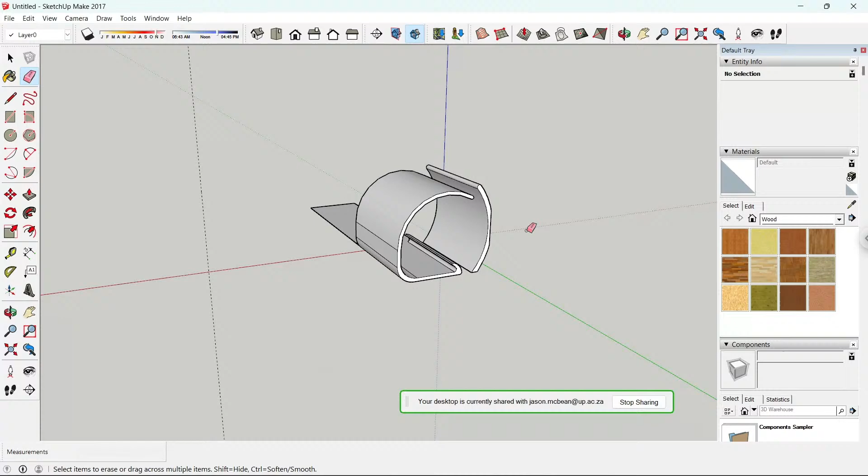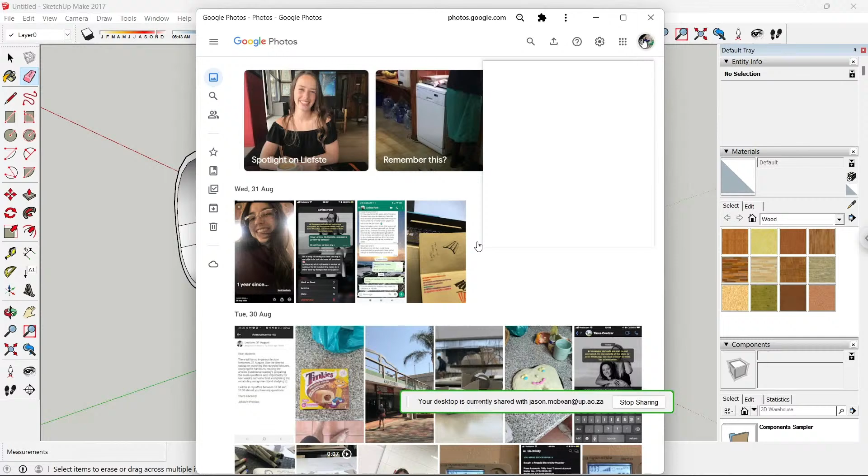So I have like 5 different accounts and it's grabbing photos. No worries. I'd use your university one because at least you get unlimited space. My personal one is full now. Awesome. Yeah, it's screaming at me at every moment on my laptop. You're at 101%, okay.

How's it going? Go to Google Photos.

It's taking me the wrong way around. No. My brain's not working, no worries. Is it this photo over here, maybe? Where, was it this photo here?

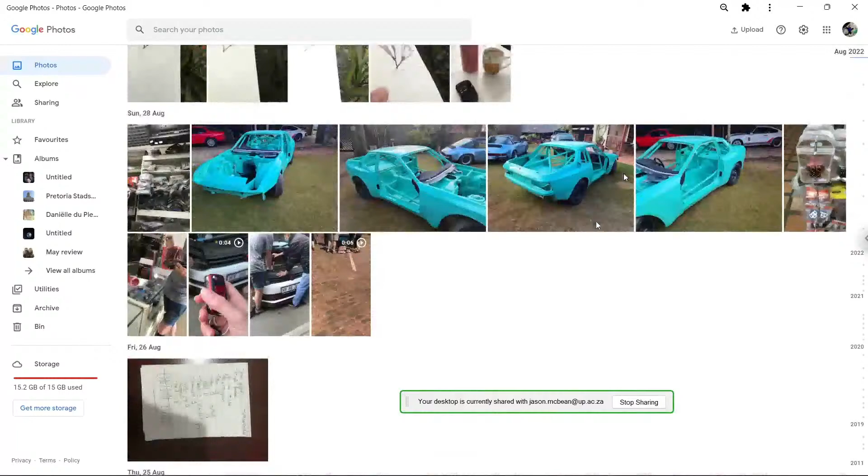Do you have any sketches here we can look at? This one or the other one. I don't know that, okay. Sure, go.

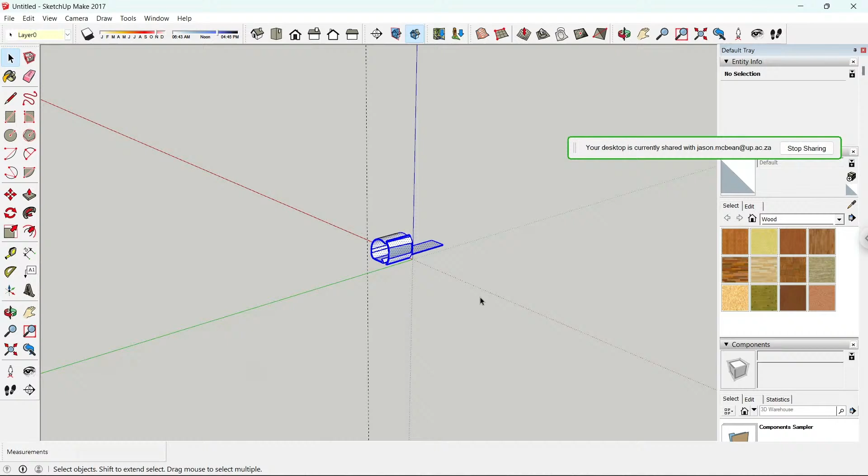Yeah. Okay now, can we make a copy? We'll do that in a minute. Okay, yeah, so what I'm going to do is I'm going to delete this guy. This is going to be, so let's just create a face. And I'm going to use this face. You'll see now, this is going to be like, it's going to be quite organic what we're going to do. So let's just create quite a long one.

And I'm going to extrude this up. Spacebar. Push pull.

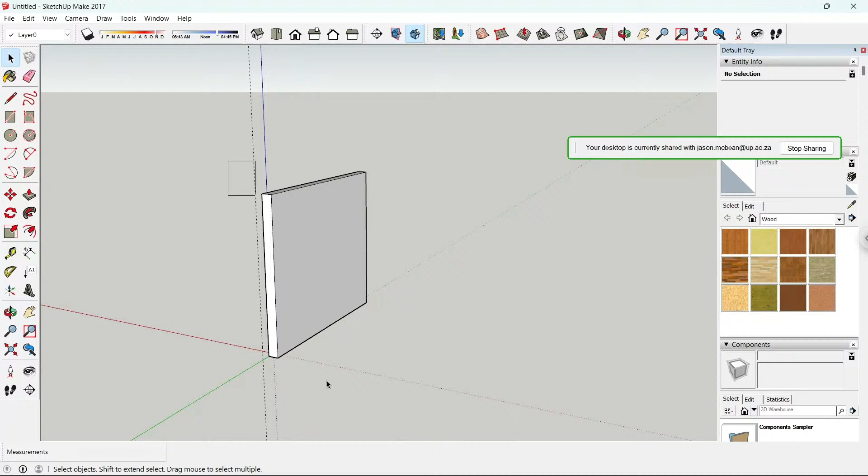So what we're going to do is we're going to create a shape. All you've got to do is break this thing up into pieces. SketchUp can use plugins to help do more organic stuff, but this is just creating a series of shapes that you then cut away what you don't need. So you're going to grab this edge and use the copy tool. So C, M for move, and control.

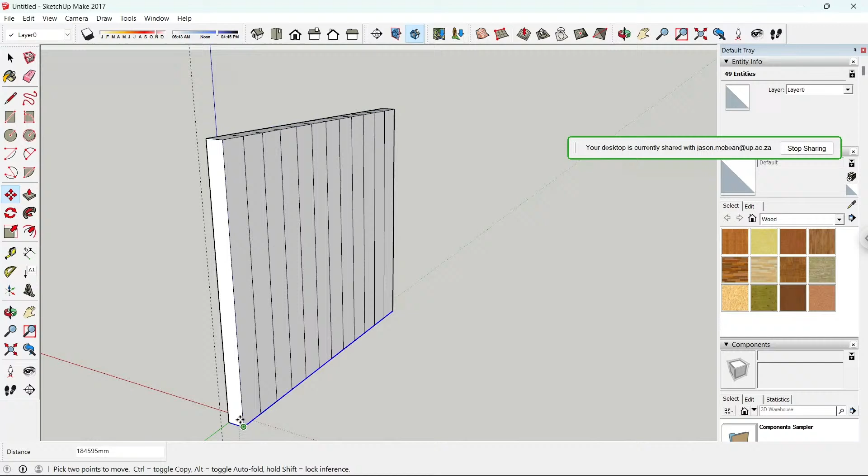If I drag it to the end and divide by 12, you see what it does? It breaks this face up. I'm going to do the same in this direction. Move, control, and divide by 12. This is never going to be 100% perfect, but you're going to make a long part of it.

Then what you do is you start the line tool and create the shape that you're looking to create. All 3D software is doing this to a degree.

And let's go to there. I'm just doing this very quickly. Go back to there, go back to there. You'll see that it'll cut this into different pieces. Now, exactly that - you can use the erase tool and get rid of the faces that you don't need anymore.

You can get rid of - oops, don't do that, don't do that. I'm going to get rid of all this stuff here because technically I don't need this anymore.

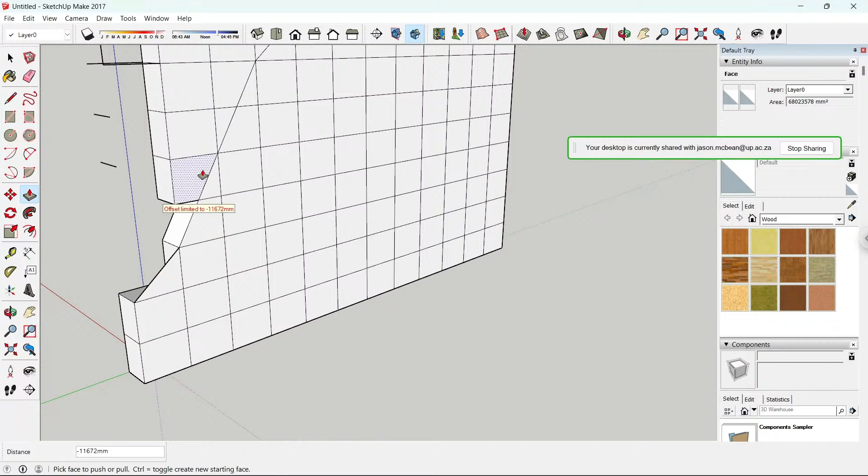You can also use the push-pull tool when you get closer to these edges - you can push-pull these out. So maybe that's a better option for now, because then you can just get rid of... yeah, it gets the width, memorizes the width. You can double click on it.

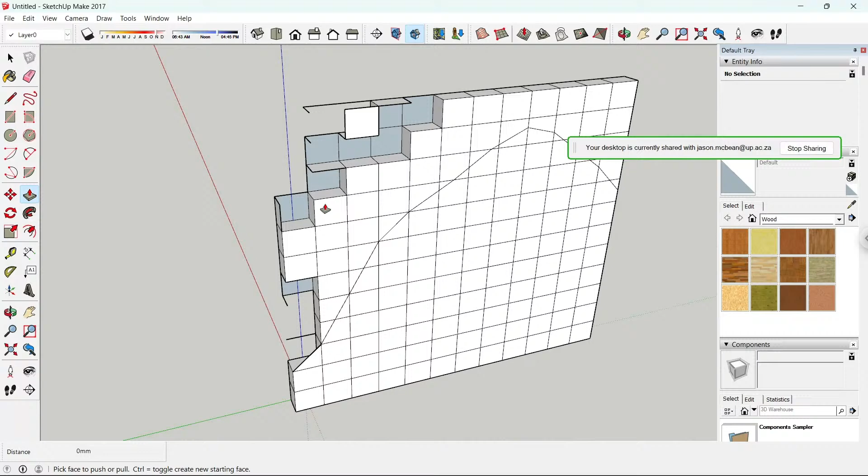So I'm going to get rid of this one. Yeah, there we go. There was just a back face here which I should have maybe handled differently - I see it hasn't quite worked there. So let me just quickly go back and use the push-pull tool for most of them. That's going to help.

So grab that guy, push-pull. You're going to use the push-pull tool, shortcut P. Double-click, double-click, double-click, double-click, double-click, double-click. These ones you can also just select around here, then delete them. Yeah, exactly - you just want to punch out the shape.

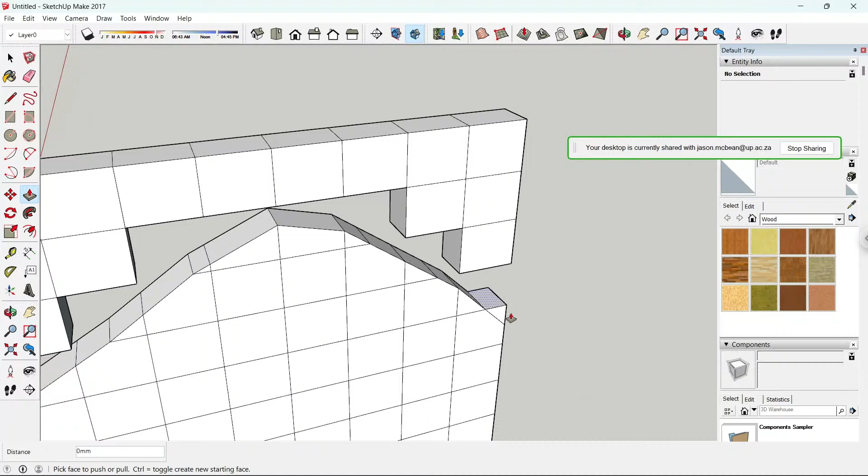Oh, see now I've broken the chain of command. Now you literally go and cut out what you're looking for very quickly. And I mean, this is fine. You come on. Yeah, so now come on. Good, there's a lag with this.

Okay, now we can get rid of the ones that we don't need. There's a bit of a lag with the internet, so that's why it's giving me a bit of an issue here sometimes. Okay, now you create the shape that you're looking for.

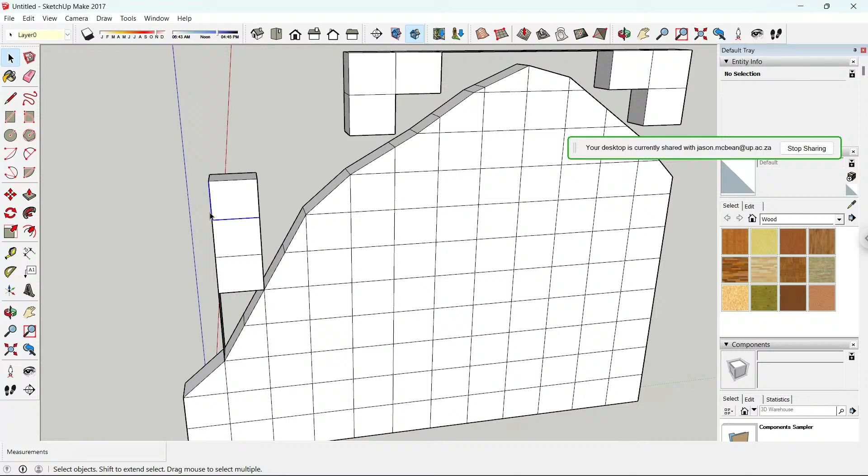Now what you can do is actually use - I'll make this a group. I'm going to put this in a group so it's easier to control when you need to shape this around. So you're going to use this like clay, and shape it around a bit of line work.

Let's go to front view. Let's go to your cameras - camera parallel.

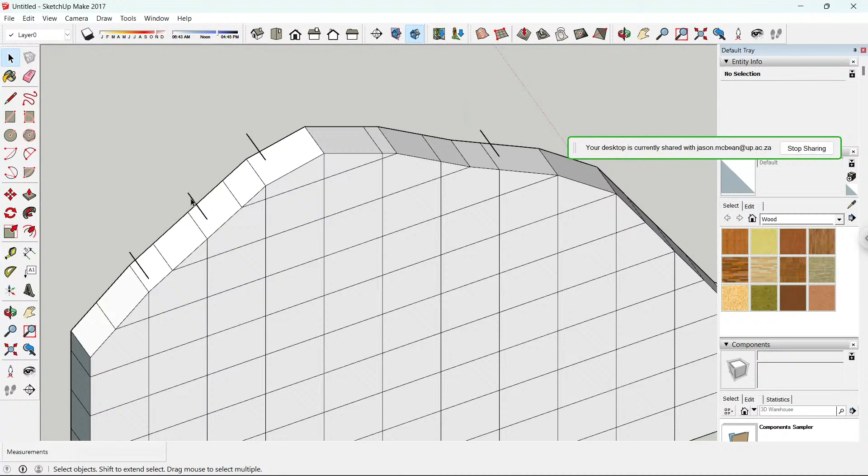So you've got this option that you can use first - this is one option. Now you work with this like a bit of clay. Make this a group quickly - make group, make group. Then you can start using the freehand tool to kind of sketch the shape that you're looking for.

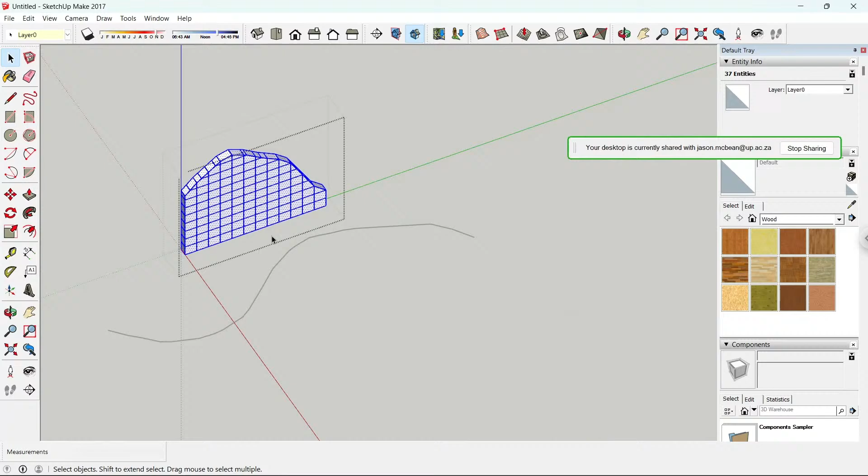Then what you do is in the group, you can start moving these faces. I'll put this thing in the right location first. So move this guy.

It's just a camera view because we're still in camera perspective. Now you put these - grab it at the bottom here in the middle as well. So grab the middle. Now you put the stuff where you need it.

Then you shape this thing, and you see as you start dragging these shapes in. Sorry, let's just grab this whole edge here. Won't the follow me tool help as well? You could do that, so maybe let's do that option rather. You could use the follow me tool along the path first.

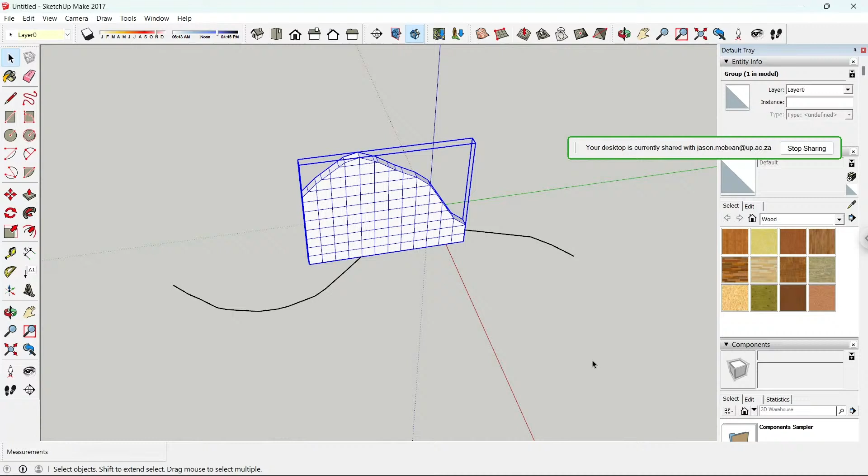So create the path, then you divide it up, and then you twist and move, and you get rid of the sections that you don't want. Because once you've got the shape, then you draw on it. What I mean is, now you go and move these. Sorry, it's lagging so much.

Internet's so bad. Cool, you can now grab the faces here and start moving the faces. And now you go to the edges. Sorry, it's lagging so much.

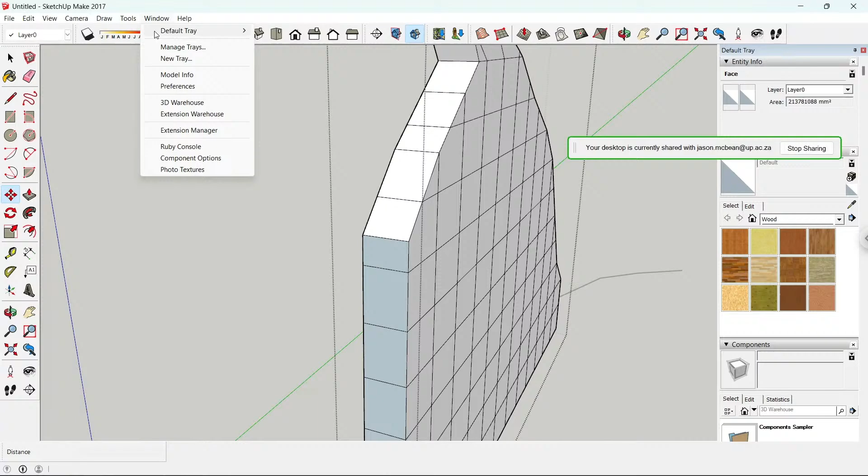I just want to go, you need some more tools here. I just want to quickly show you this as well. You need some more viewer toolbars. You want your display tool so you can see through your object.

So you can say, there we go. You want to put this in wireframe mode. Okay, so now, here I can go to side.

Now you select all of these edges. Now you use the move tool. Now you can move these and lock it on the Z axis, using your arrow keys to lock it on an axis the whole time. Okay, so here you can move that.

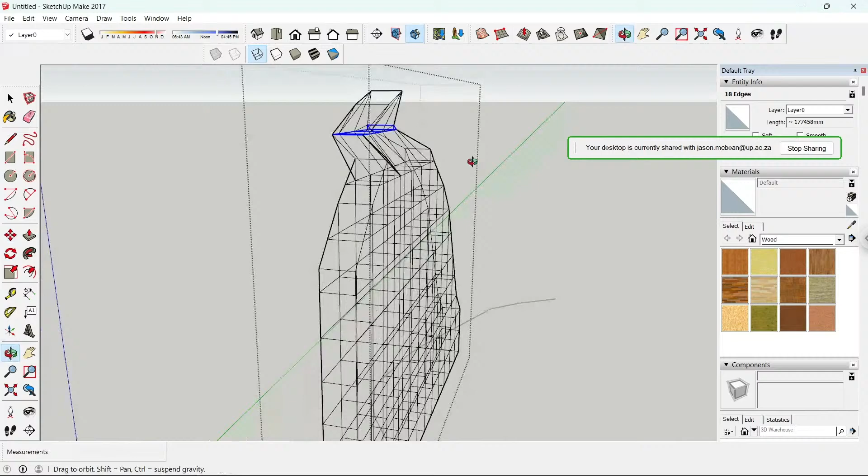This takes a bit of time, but you can sculpt this quite organically. I'll use the follow me tool, then divide the face up into a series of sections.

Or what we could have done, let's do this route rather. Let's grab this guy, use the offset tool in this direction, create a line, and then use the push pull tool.

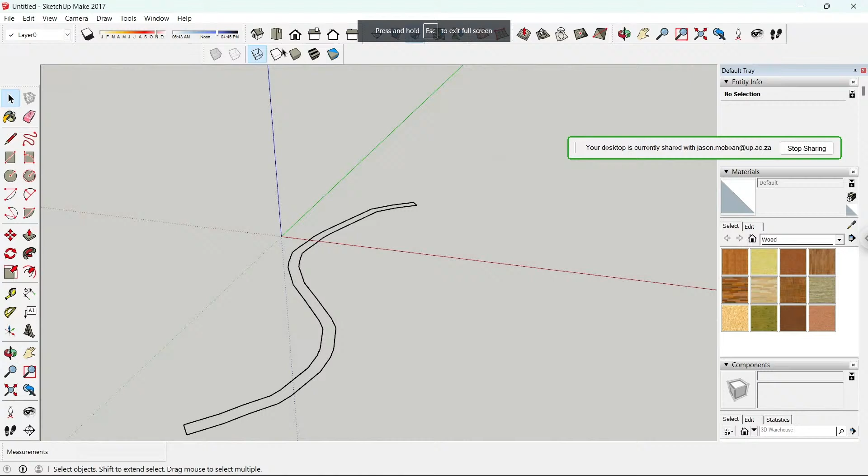But it doesn't create a face. You've got to create one more and then it will. If that doesn't work, what you do is you create a rectangle.

Delete. So here, create a rectangle. Now it will. Delete that. And now you've got an internal, I should have— Control Z. Control Z.

Push pull, and then you can get rid of the context. Okay, now you can get rid of this. Delete, delete, delete. Then you grab this top face.

Why won't this thing close at the bottom? That's strange, this thing should... there we go, okay good.

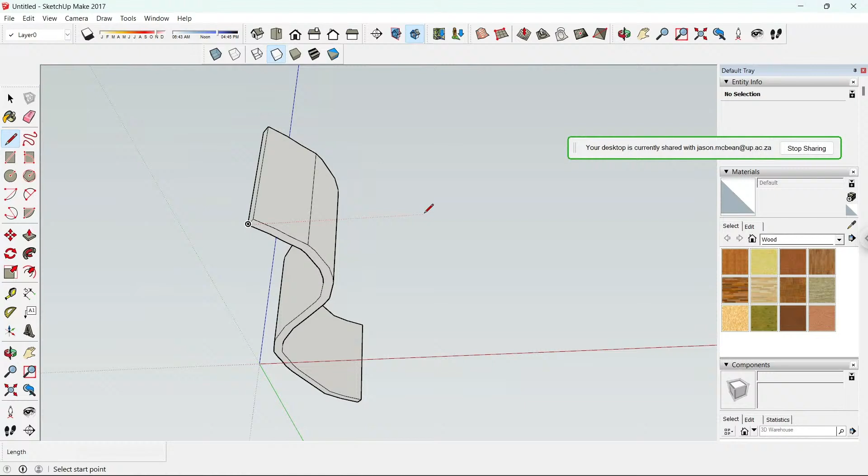Grab the top face, move, control, and you drag this down, divide it by 12. Try and get a good number of divisions.

What you can do now is grab this whole thing, you're going to activate, you see these edges here? So what you do is go to, I hope it's on here, let's just move this out of the way. It's called smoothing. If it's not on here, there we go.

So here you're going to pull this back, and it gives you all of these edges. Now you simply follow, create that line that you want on that face. Okay, so now when you're done, you just add smoothing back.

Okay, so now you're going to use line. Here you're going to go and say, this is quite a lot like Blender, like with the smoothing. Yes, exactly.

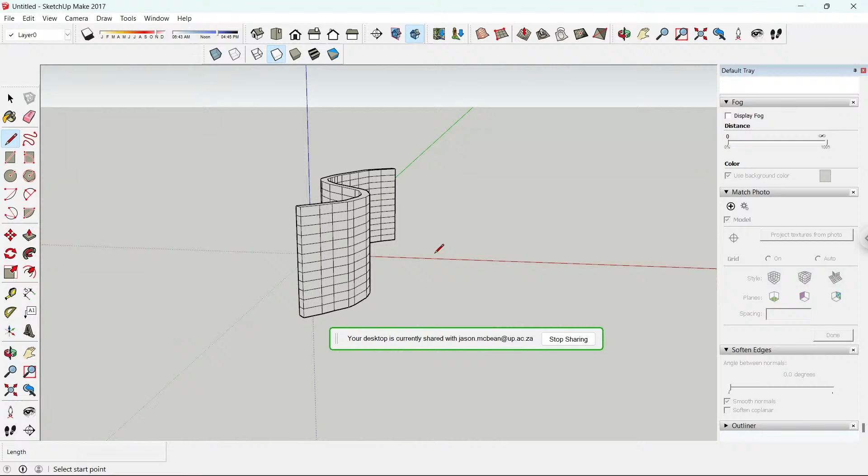So here, look, I know that it's difficult at the moment to kind of get this to work correctly, but you can cut away the stuff that you don't need. Okay, you can cut away, so cut away the shape that you want.

So create the whole shape, then you start morphing the edges away. So here you draw a line and you cut away what you don't need. Can you follow these little divisions?

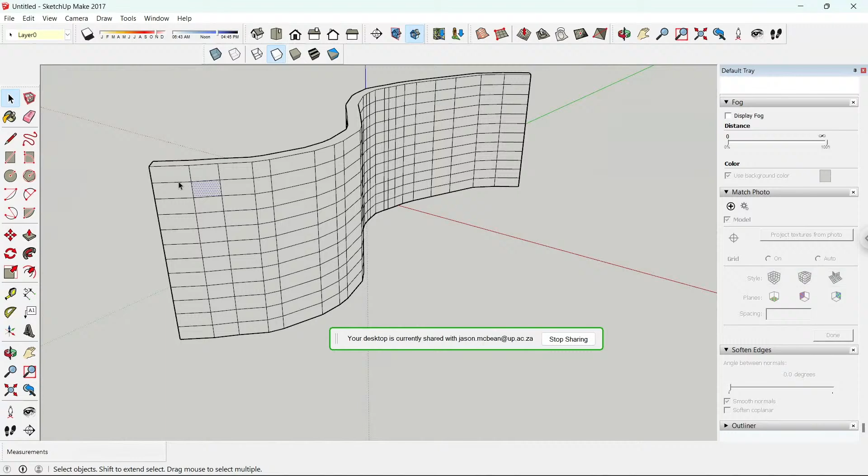Okay, so it just means now that you can push pull, and start getting rid of these edges that you just have to get rid of. I'm wondering if maybe you must rather bring this back first.

So switch off the smoothing, bring back the smoothing first. So, yeah, now let's make sure it's done it on the other side.

Yeah, now you can grab these edges, so grab the edges without the face. Select that. Now you can move, control, divide it by 12.

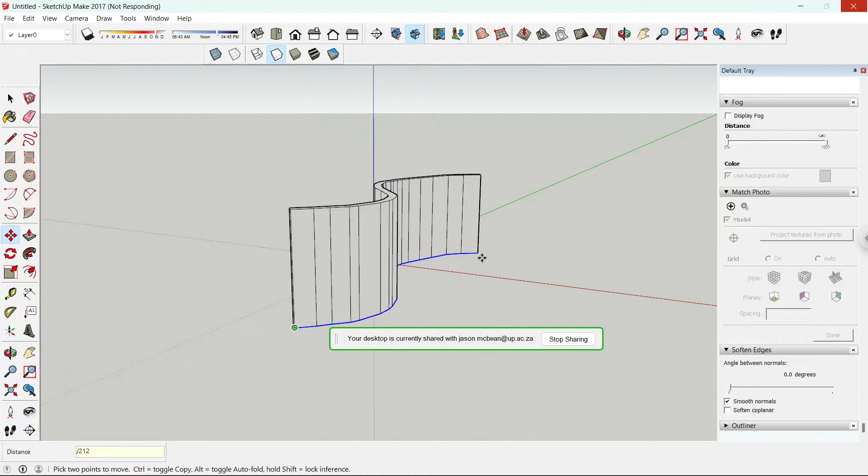Wait a minute, shucks, I went 212. Oh, undo. Okay, but you see what I'm doing? I'm pulling that shape, then you can manipulate the edges and start moving the things around.

This takes, okay don't go that crazy, okay, otherwise undo, otherwise that will cause havoc. You can draw freehand on this face, so you can start there.

But it's not going to be the same result. I would recommend that you use the line tool. I would actually use the line tool on the one side to try and get and use the divisions that SketchUp is giving you.

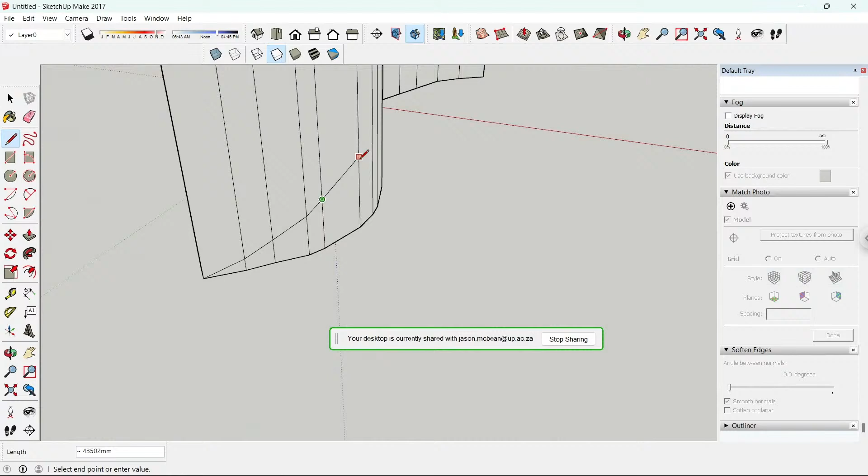Okay, so I wouldn't actually divide the surface up. I would now go and try and draw what you want to see. Okay.

Then you can use the push-pull tool. Complete this first, then you use that smoothing tool once you've completed this exercise.

I might actually show you another way to get this more rounded.

Okay, very rough, and then you can use P.

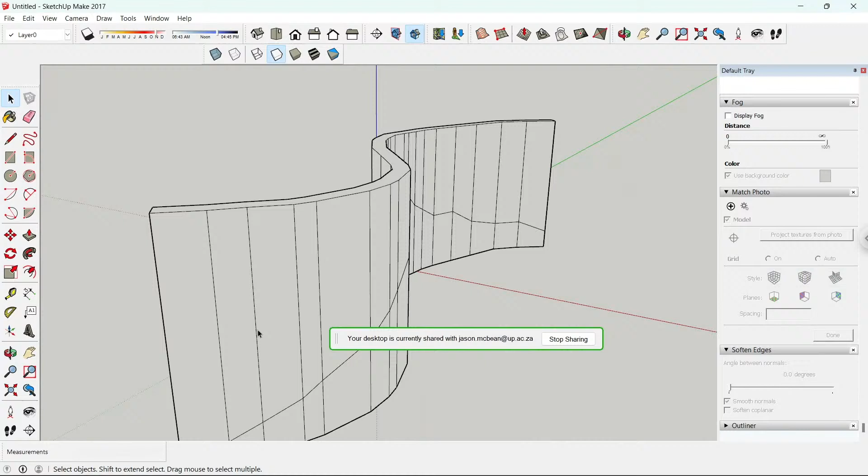Yeah, this P tool's not working. I think it's because the lines don't match up on either side. They're supposed to, because it's using... sorry, this thing is, let me just try this one.

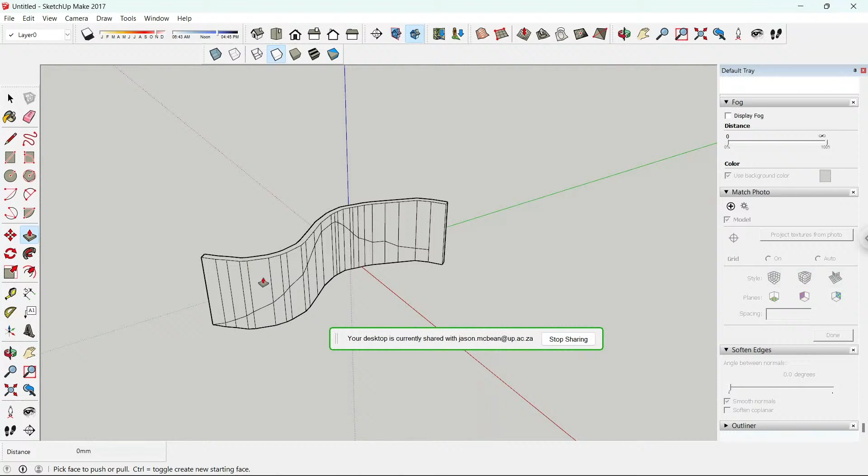Just take this line across here. Is there any other way now you're going to do this? Let's delete that. Delete, delete, delete, delete, delete.

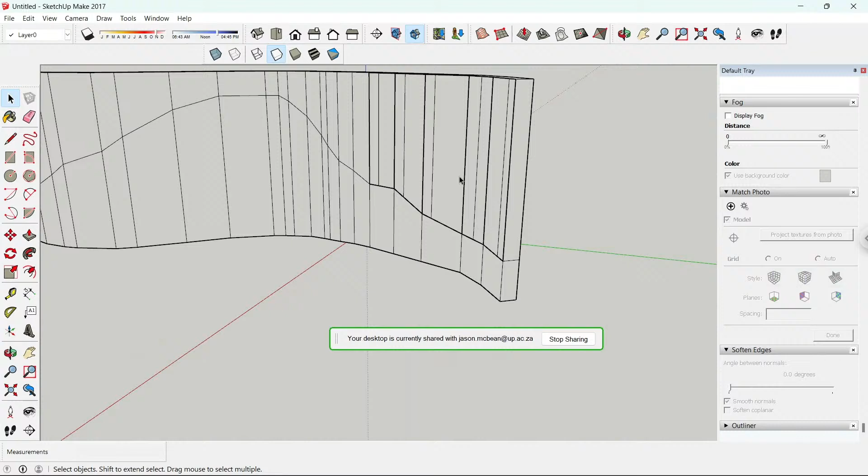Actually, what you could maybe do, I know why, because these, yeah, let's just do this quickly. You just have to draw lines across here to connect to this face over here. Okay, so why did it draw a line from there? From there?

Yes, but now this is going to take forever. It's going to be here till...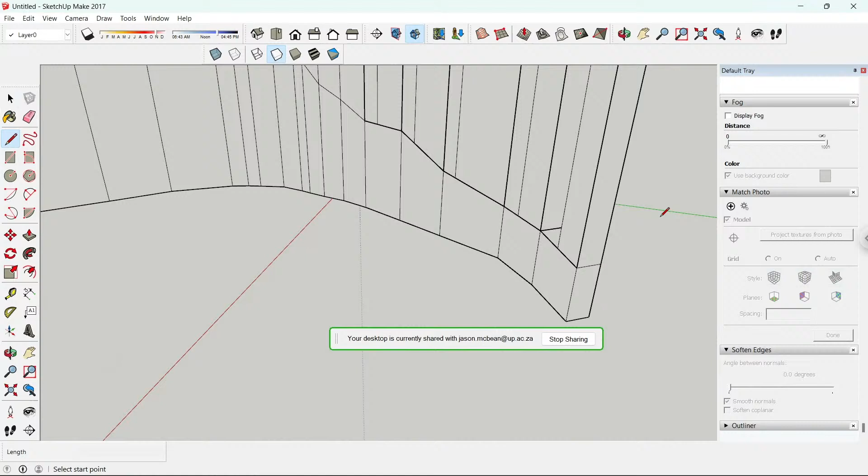Just think of another way. Would it be easier to make it one face and then do the curve and it will push pull? No, but you still have to push pull individual faces. No, but I think it would be easier to push pull individual faces and try to delete the redundant ones. I'm trying to think how the hell we can.

No, this is not that intuitive. SketchUp's pretty...

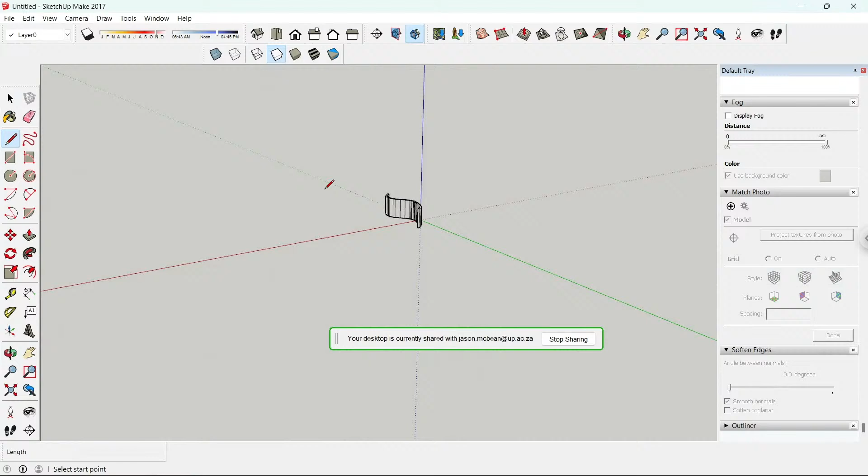I wonder if I show you how to do this in FormIt, and then you can make a call. Okay, let me maybe do that. Okay, I'm actually okay, because maybe what you can do is use FormIt to get the tool.

Do you have FormIt on your machine? I do, but my sign-in thing is confused. I tried to sign in, it's not signing in. Just double check your account, your Autodesk account.

Okay, all right, let me just show you on mine. Let me just show you on my computer how I would do this, because maybe this is a better workflow. Okay, so I'm just going to disconnect from your machine for now.

Okay, I'm just going to think now. You're going to create... spot on me as well. This table is... yeah, maybe something's happening here.

FormIt, let's go to FormIt. Okay, let me just show you this quickly. Let me do this quickly, very, very quickly.

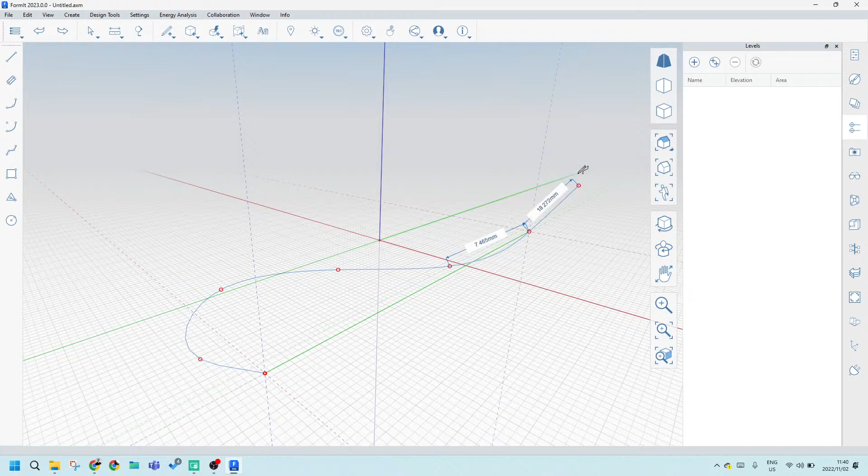Okay, so what FormIt allows me to do is use a spline tool. Now what I'm going to do is create a series of other shapes, because this is going to curve and go around. Okay, so yours is going to start curving here and then it's going to diverge from here.

So I'm going to make this a group. Make this a group, okay, so let's make this a group. Then your other spline, so here I'm going to go here. Your other spline will start going out from the spline tool. It'll start going out from here and do something like that and then come back to this object. So I've got a spline here and a spline here.

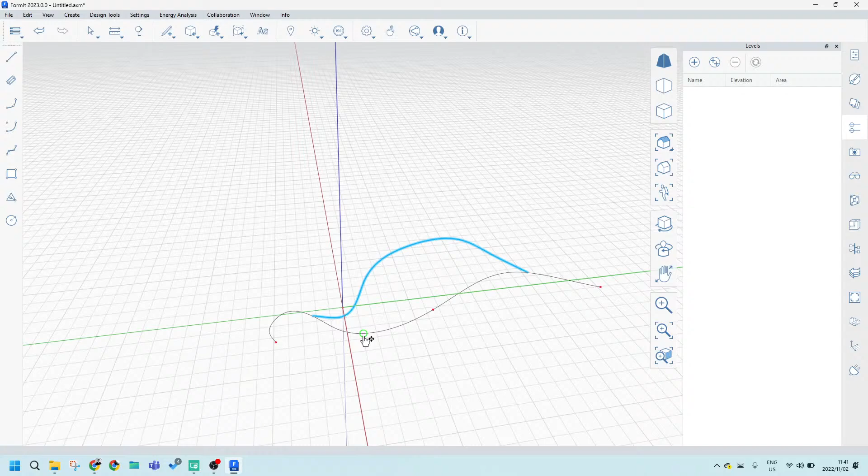Cool, just, okay, so that's to get that, but the splines are drawn flat, because I'm trying to create... now I'm going to use some line work very quickly.

So from there it's going to go up that much. There it's going to go up that much. There it's going to go up that much. Then here, this one's going to go up to - this is different, I'm going to explain now.

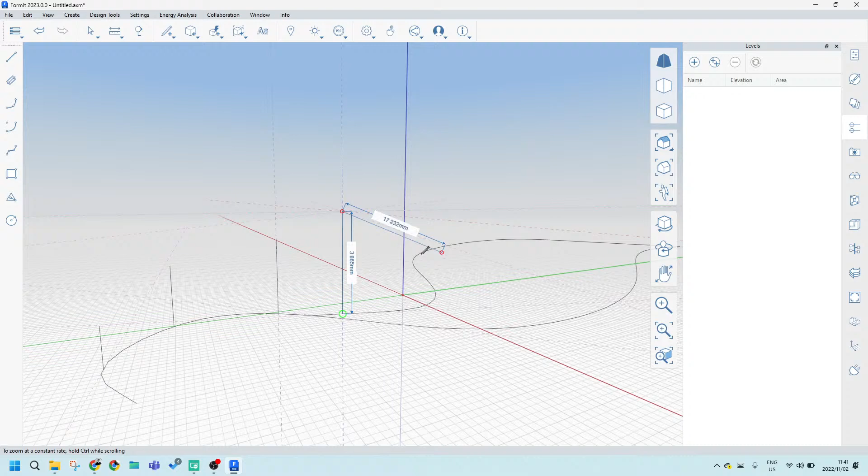Here it's going to go up by that much. Here it's going to go up... fine, it's going to go up by that much.

Okay, so we're going to have a series of splines. The spline's going to go to here, then it's going to go in that direction, and then here we're going to have some shapes that will start connecting. Okay, it's weird, but you'll see now it'll make a lot of sense. No, I understand. This one, we're going to go up to here.

This one's going to go up to here. These lines, these points, you can always go back and edit them to get them to the correct height. Okay, this should have been a curve, but anyway. It should have been a block, a group, so I'm not, but it won't affect what I'm trying to do here now.

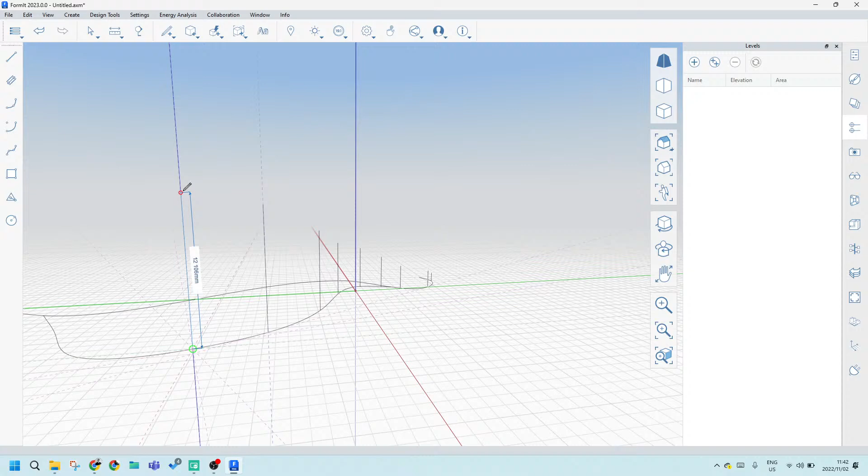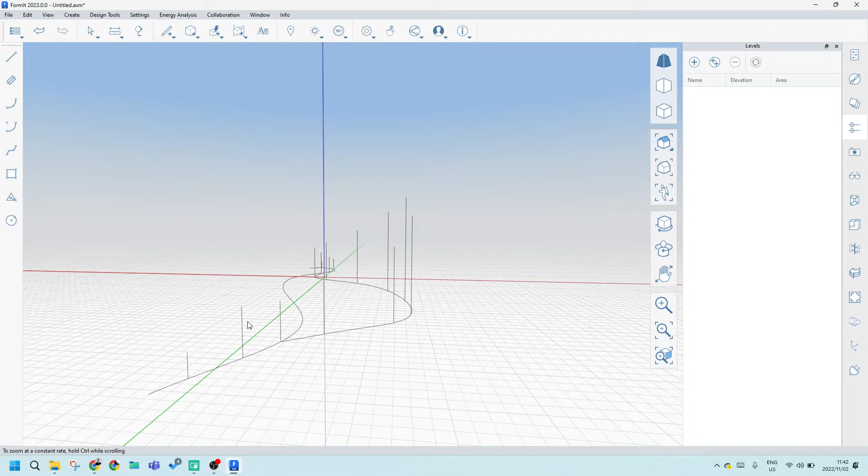That's my highest point, and then I'll come back down. I'll come back down here to here like that. This point I can grab this vertex and pull it down a bit. Now I'm going to grab the vertex, exactly.

Now I'm going to create another spline tool. I'm going to make all of this a group. So there's a group within a group, because if you don't, it's going to start intersecting. Here I'm going to use my other spline tools. I'm going to click there.

This is what SketchUp doesn't have. You could use the same workflow that I'm doing here now to create the form, but then extruding out the solid is going to be tricky. Yeah, like I told about the line work, SketchUp is very rudimentary. It's got good tools, but it's also not good.

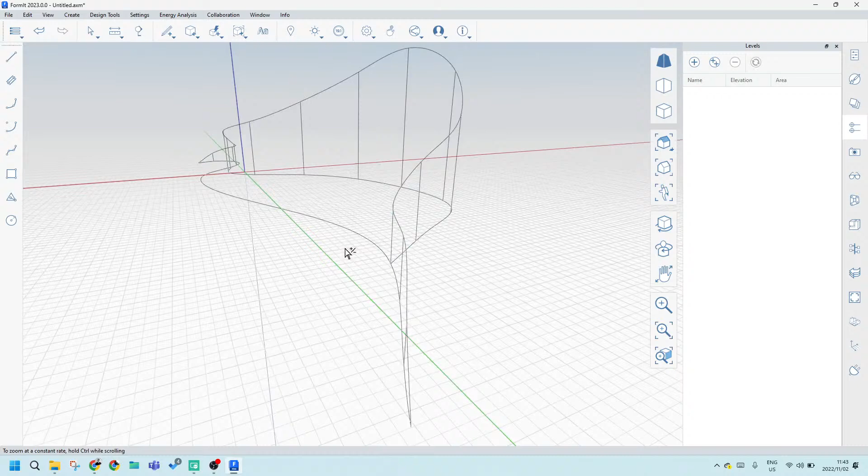Now, you see what it's done? It's created a nice shape. So these ones are going to be vertical. But now, watch this. I'm going to use my axis tool very quickly, and I'm going to put my axis on this guy over here.

Now I'm going to create a series of other splines, because I need to kind of get the shape that I want here. Okay, now this axis tool, all I do is I drag this up to here. Guess what it does? It moves my work plane in the same direction now. Yeah, that's nice. So that's neat.

Okay, now grab your spline tool, select there. Now you can try and get the shape that you're looking for. And then the last point, I'll try and snap. I should have created a line here, so let me just see on the Z-axis. Lock it down. Let's see if I can snap it. There.

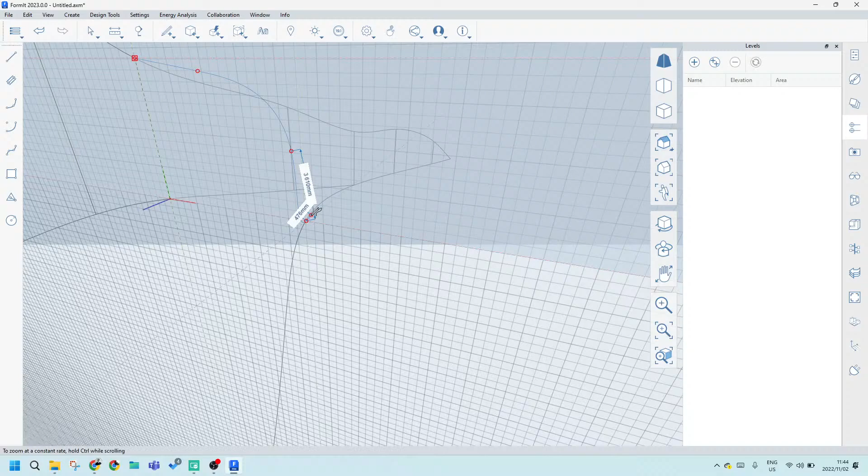Good. See what I'm doing? Don't I do it for every single one? Yeah. Grab. Then you just do the same workflow.

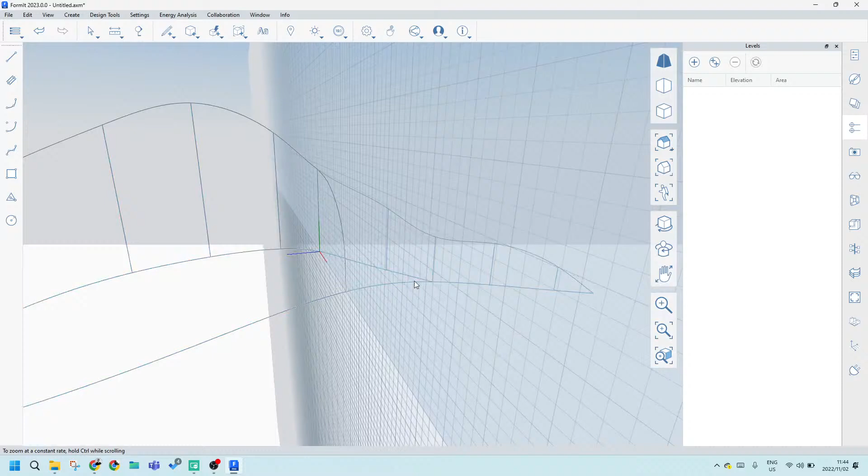I'm just going to use arc tools very quickly to do this, just so that you understand kind of what I'm doing. This might get a little tricky here, so we might have to use another arc there, for example. So let's just go back here, reset. I'm going to use my arc tool, just to speed this workflow up, but we're doing the same thing.

So from there, anywhere there, I'm going to use this. This arc tool probably won't work as well. Snap it on the Z-axis, so we can kind of get what we're looking for. We see what it's done there. And you'll see it'll work perfectly in line.

Okay, likewise, just try and get it somewhere in line. Then you snap it on the Z-axis. See that? Actually, that arc tool actually works pretty well. Yeah, do that. Snap it anywhere there. Snap it on that axis.

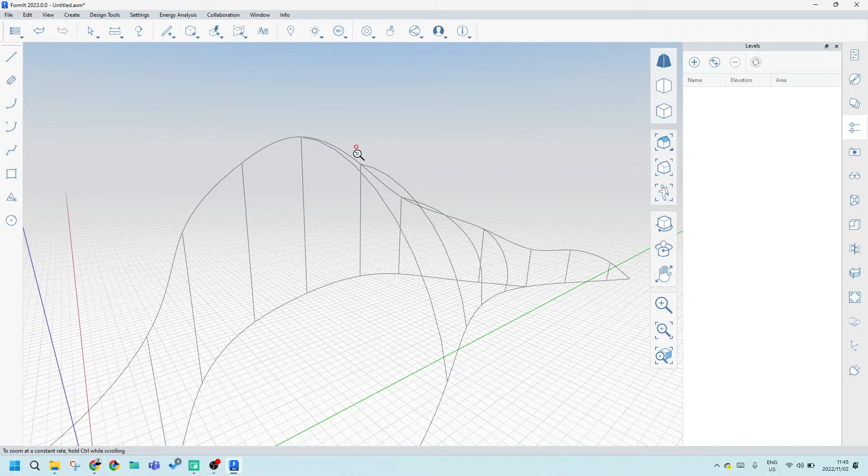So you could actually do the same workflow in SketchUp, and then you just start. The only problem is to try and join the things together. That's where the problem starts.

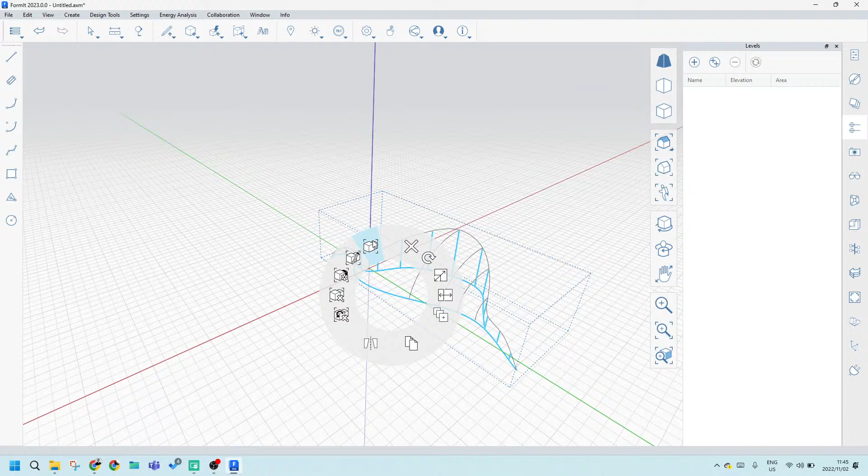Okay, now what I'm going to do is I'm going to explode everything. So all these groups I'm going to explode, and that's going to start making, so let's say explode. These things will start joining each other.

These things, shouldn't they just be part of the group then? Shouldn't the arches then be part of the group? No, when you explode it now, these things will start splitting up. They'll start splitting each other.

Okay, this should have been split up. I should have done this maybe. Should have maybe done the arches now. Let me just do it now quickly. Sorry, it should have split the surface up.

Just keep going. Okay, now. Yeah, this should have split this one as well. Why didn't it split this? What you sometimes do, Control X, edit, paste in place.

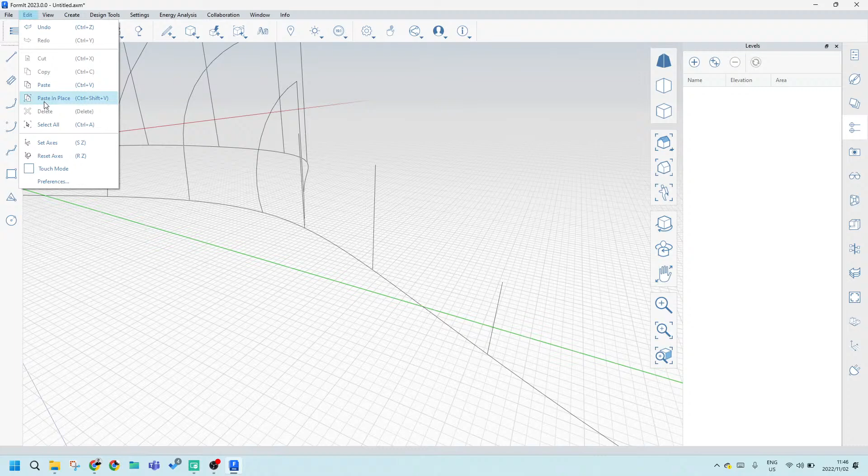Okay, it should have broken that up. Because it's broken that one up. Why hasn't it broken that one up? Yes, that would explain when you explode it. It does. I understand that. Anyway, it should have exploded.

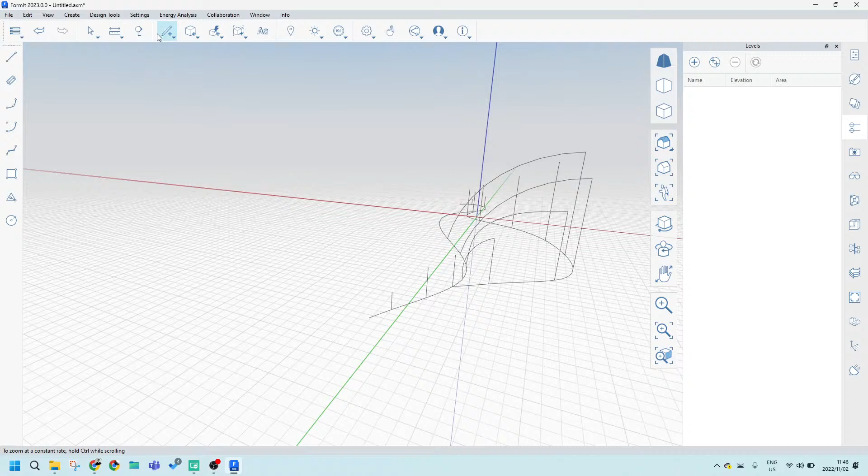Let's quickly do this one again. I'll explain why. Because now it will actually, so if I create the spline tool now, because I've got these points in place, it doesn't really matter. It'll actually, so maybe I should have done this last spline last.

Endpoints. Let's go to that one, that one, that one. I'm just going to stop there. That's strange. You should have broken it up. Let's grab a line here.

Very strange, it should have snapped. See, it's not quite on that point there. I didn't say it didn't snap, so that was my bad. I'll just create this again. So, create an arc.

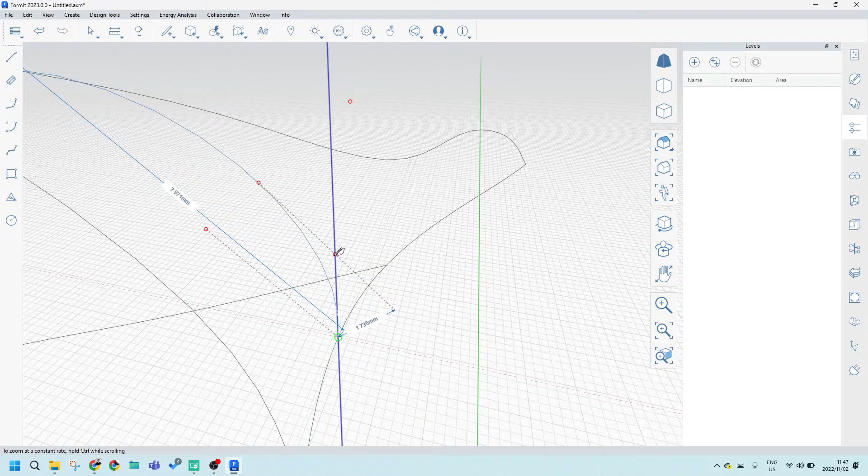I'm going to use this blue axis, the Z axis, so lock it on the Z axis. I'm looking for a curve like that. Now I'm going to grab a line from there to there. There we go, line. You just have to simplify this. You can delete those, you just want to simplify, because now, watch this.

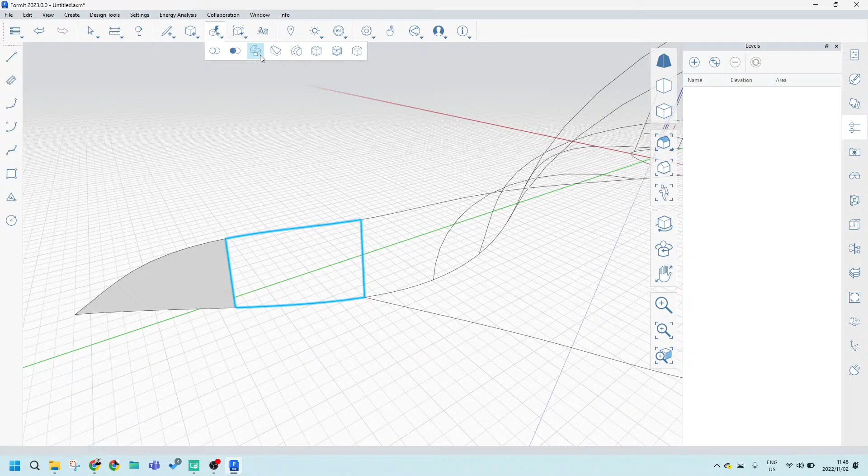If I go to this command here - what does that do? Make faces. It makes faces, watch this. Now this face and this face - it's going to be, this is interesting - so it's going to be that face, and that face, that face, and that. There we go.

There was a split there already, so that's why it's like that. Let me just use this tool. I want to close that. Sometimes... that looks sexy, there we go. Now this one, that of course didn't split that one, so yeah, I'll just make this again.

Delete, so I want to go delete, but what's neat is I don't have to worry about that because check, this one will work, that will work. So here I'm going to go here. The software just fills it in by itself. Watch this.

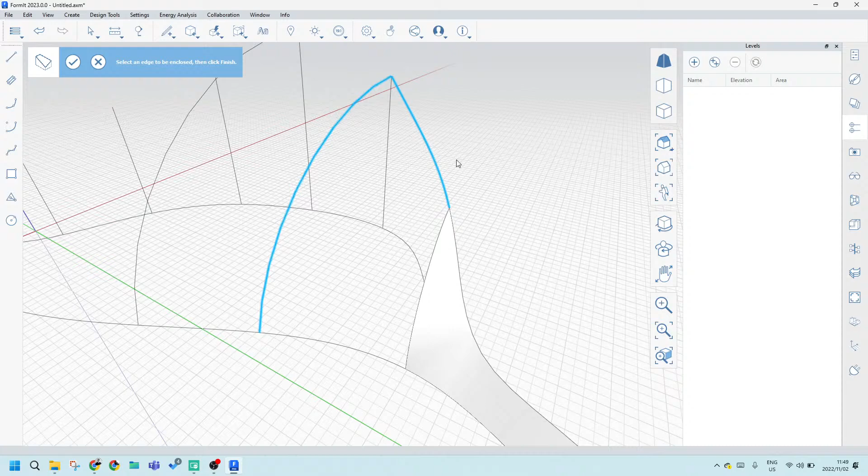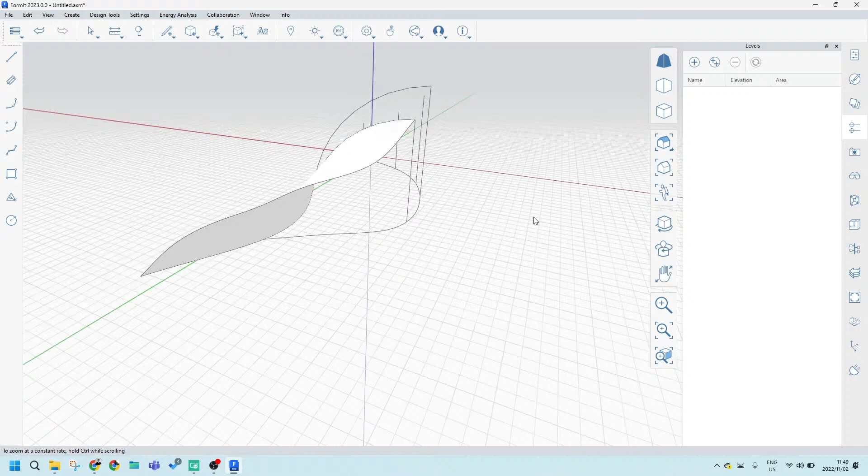That's very nice. Now to try and do that in SketchUp, it's not easy - it's a bit of a mission, but you can export this straight back up to SketchUp. Now, to make this thick, you might have to create another curve underneath here that follows, if you want thickness. But what you can do is, I'll show you now, you can select these edges and extrude these edges.

Okay, so you can copy these edges, extrude, and you give it a thickness. All right, so you can close these faces. But you can see now, this is beautiful, way easier. Okay, so here, if you want to start filling this in now, you can continue.

Let's see if that was broken up. Yeah, now you just keep going. This is just going to be a pure straight, so let's say spline. So let's use this tool again. That should be broken up.

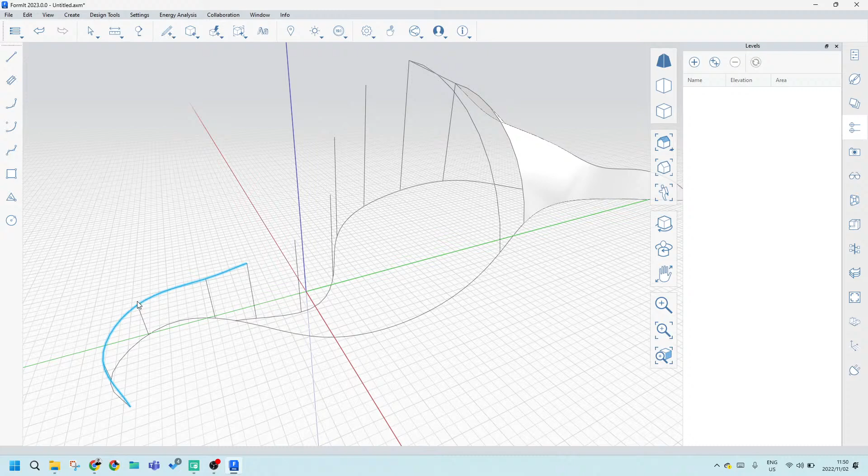That's strange, I would actually do the breaking up once it's done - put the spline in first and then break it up. Now use line, there is an endpoint here. It doesn't want to snap on the endpoint there. That is strange.

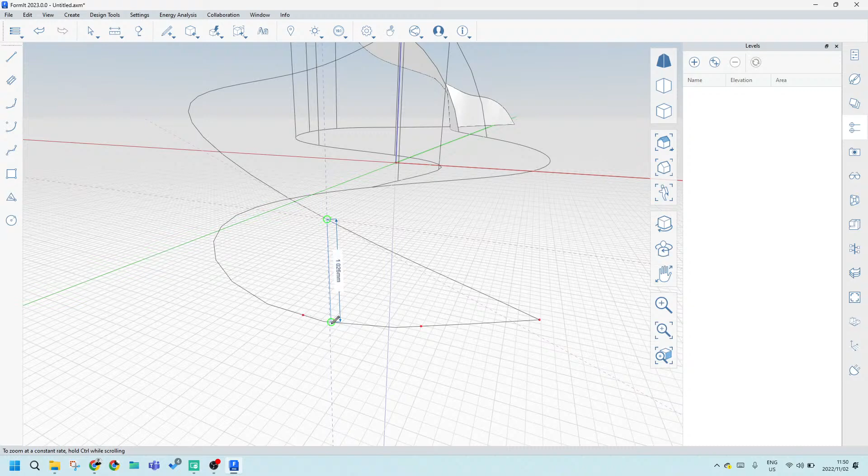See if it's split up. Yes, these things - switch off your grid as well, it could also be snapping onto your grid. So switch the grid off so you're actually not snapping onto the grid, because that's also freaking annoying.

Switch off grid. Can I take this into Blender and then add a solidify modifier? No, exactly that. Yes, in Blender you can do that, and then you can pull it back as a DAE file. I'll come back to you with that because I don't know that export stuff that well.

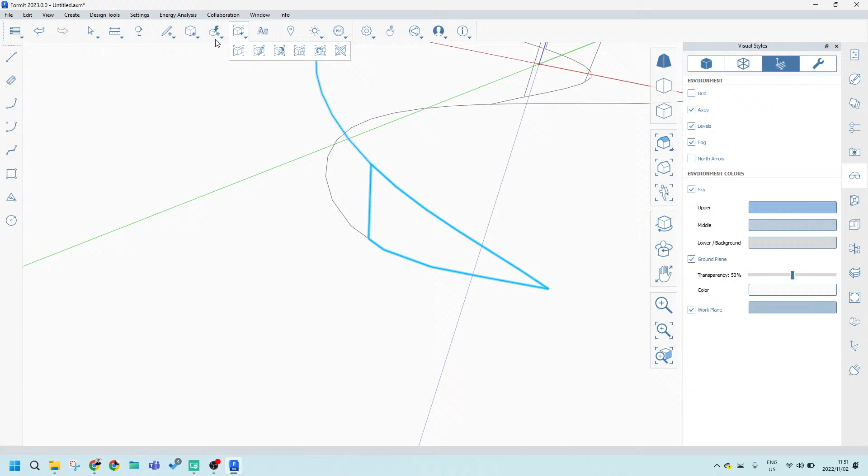Let's see if it's split up now. There we go, grab that. Because in Blender I can sculpt it. Yeah, exactly. Now you can see you can get that, then you add this solidify. So what you do is, watch this.

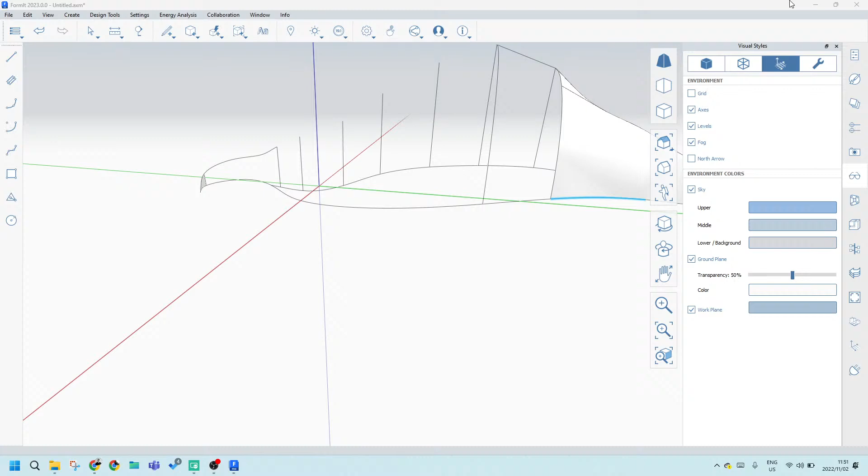Export locally, DAE, that's what you use, Collada, export, Desktop, I'll quickly show you. Okay, Desktop, save, Blender. Last night I tried it in Blender and then I got distracted because there's a new update and it updated automatically, and then I saw the new buttons and I was like, ooh, what is this thing? What is this thing? And then I got distracted and I had to close it.

But in Blender, you can just go face, face, face, face, face - you can create the shape quickly, and then in Blender you can create it further. So that's your workflow, this will be easy now. Yeah, no, I think I understand much better what you're doing, because once you've done it in Blender, you take it back - then you do your setting up in SketchUp, because SketchUp opens these as well.

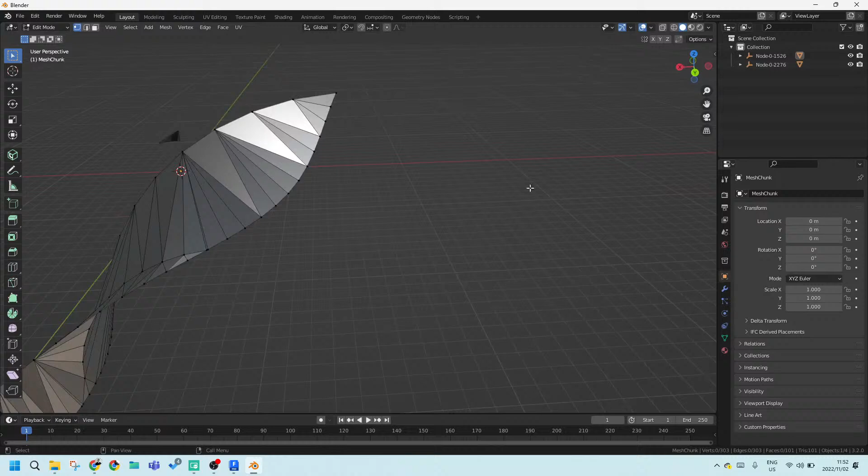Okay, so watch this. Delete. File, import, Collada, okay, Desktop. Watch this, import, voila, Tab. Now you can select these faces, now you can go and add more detail to them. But you're right - Tab again, solidify.

So add a... and then give it a good offset. Don't worry about the faces for now, it'll look a bit strange. It's just because you've got faceted faces, but check, it's done exactly what you wanted. Keep rim, so it keeps the rim.

Now you just simply pull this back into File, Export. Don't worry about this, Collada, Desktop, and you can replace this one, Export, FormIt. File, Import, Locally, DAE, Desktop.

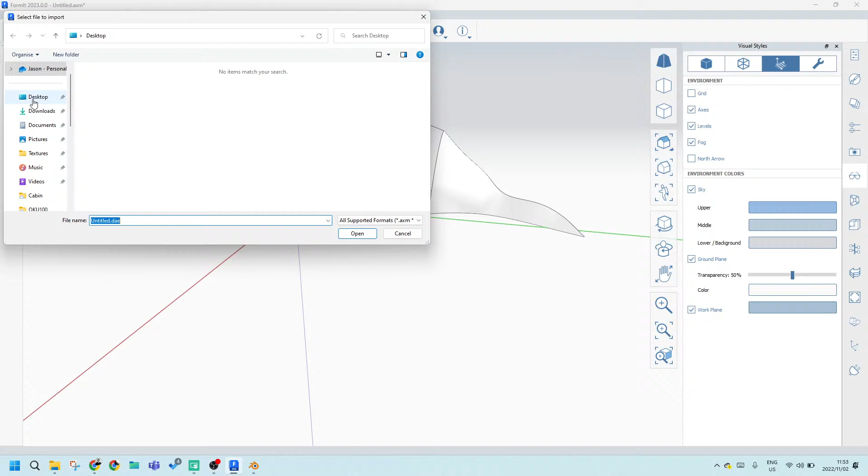I can't bring it back. I might have to export it as a SketchUp or an OBJ. Oh, shit.

You bugger. You might have to open up SketchUp first and then save it as a SKP file, and then FormIt opens it up as a. So let me just quickly... why won't it import?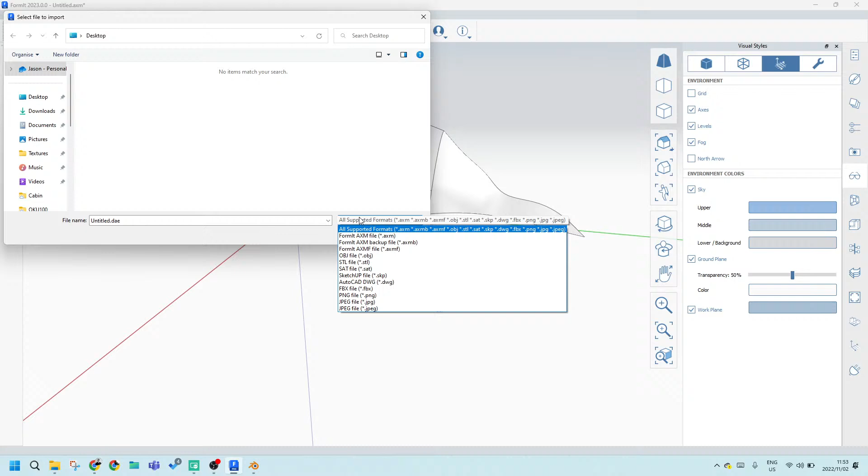Shucks. Why won't this thing import DAEs? Crikey, yeah, we're making this difficult.

SketchUp. So let me just show in SketchUp quickly what you do. Okay, you're really using all three software now. Yeah. Okay, this guy starts SketchUp. Now you literally bring this back in, and then you bring it back into FormIt, because FormIt opens up SketchUp files directly. Okay.

So it doesn't need to be the same. No, yeah, you don't even have to, just literally save it from SketchUp Make. So you go to Import. I must say there might be a plugin. There we go. Import.

Oh, it didn't give me that thickness. Let's just quickly see something. Did you apply the modifier? Probably not. No, that would be different. No, it does. Makes a huge difference.

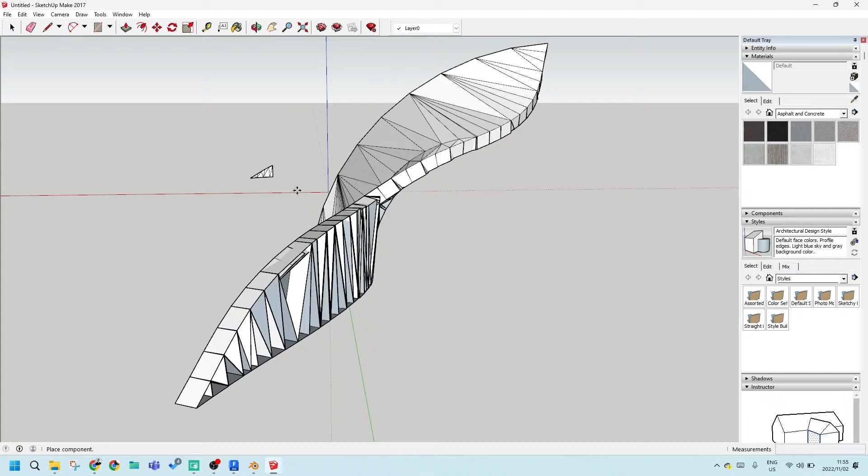File, Export, Collada, Desktop, Export Collada, File. I might have to give it a new name. Oh, there we go. Shit, but it didn't do a really good job.

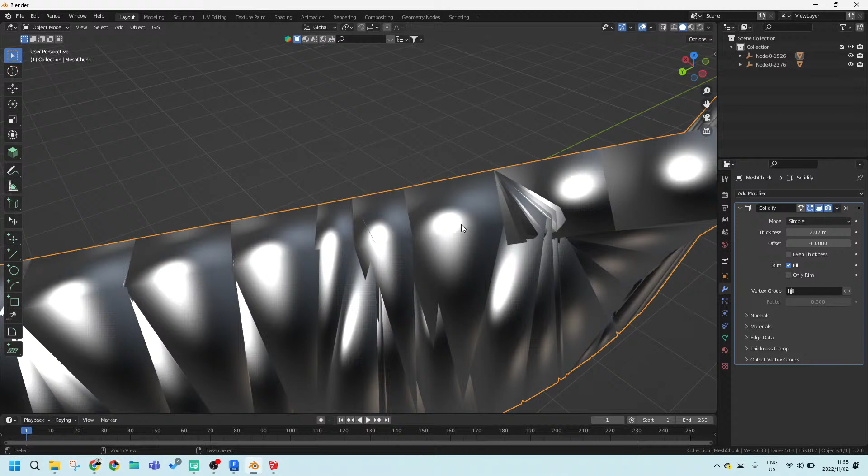I think SketchUp makes the lines very, very... no, it didn't make this a proper solid. You might have to, I've got a feeling in Blender, undo, you might have to make sure that all the dots are joined. See, it hasn't done a good job. Here, yeah, tab.

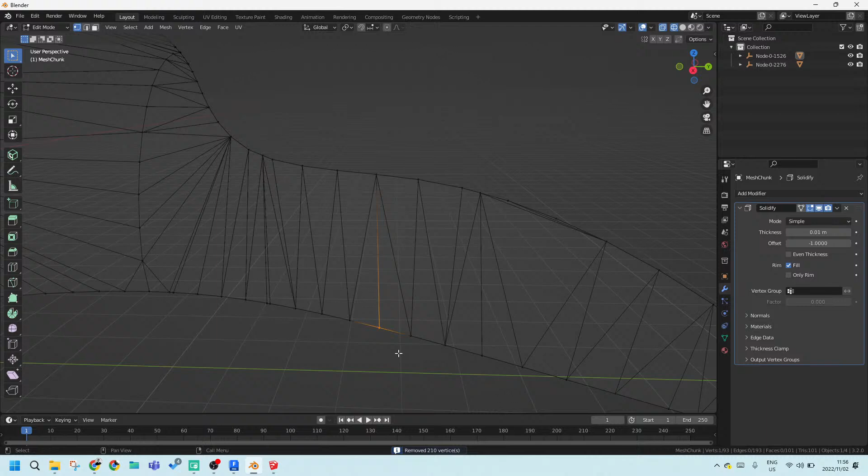So here you're going to go to distance, and you're going to just add a couple. Let's make it, yeah. Now make sure that you've only got one vertex. Yeah, now it will work. Okay, and that's a good tool.

What exactly did we do now? I merged all the vertices because I made sure those vertices are one and not a lot, because it actually, so here, there we go, that's way better. Let's go to tab now, because we've really taken this thing to the next, solidify.

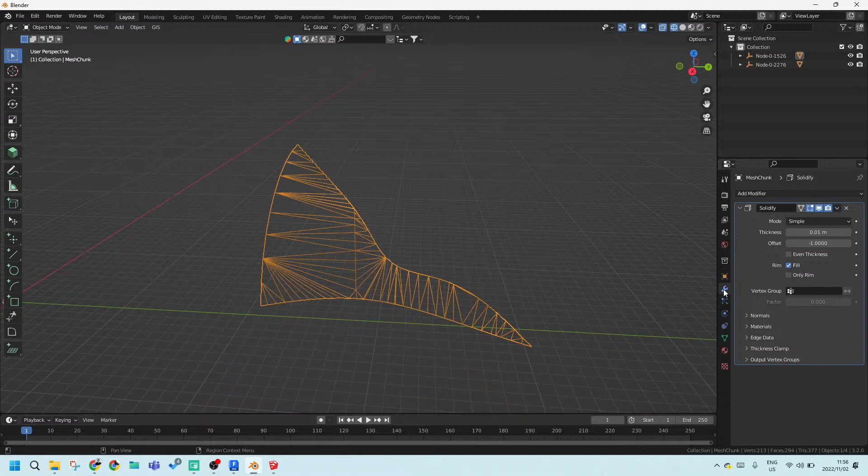So here's the test now. If I go to, that's better. That's better. Now that's the way it should look. Okay. Now keep your rim. Okay, now that's way better.

Now in tab, once you make this a solid, it's got automatic smoothing, so don't worry about that. So once you've got that in, okay, you're gonna go apply this. You should select it first. Tab. So now I was in edit mode. Apply. Now this guy. Tab.

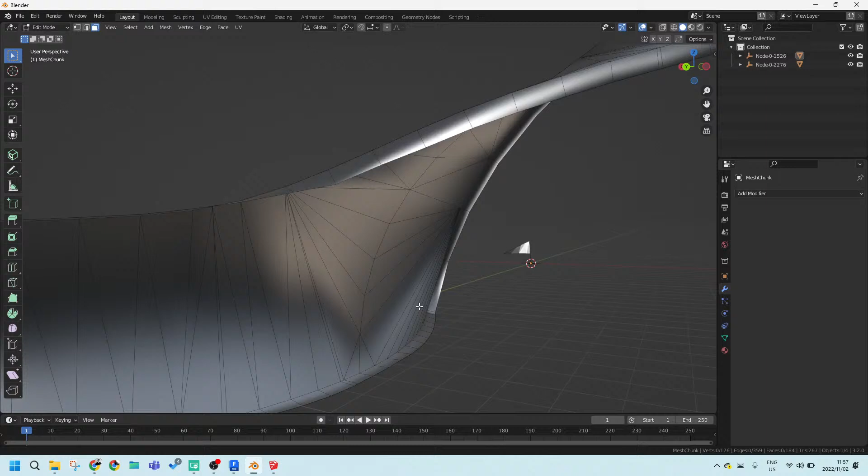Now make sure it hasn't put a cap on that. So what you're going to do now is you're going to use this tool over here. Select edges. Alt. See what it's done? Okay. Fill.

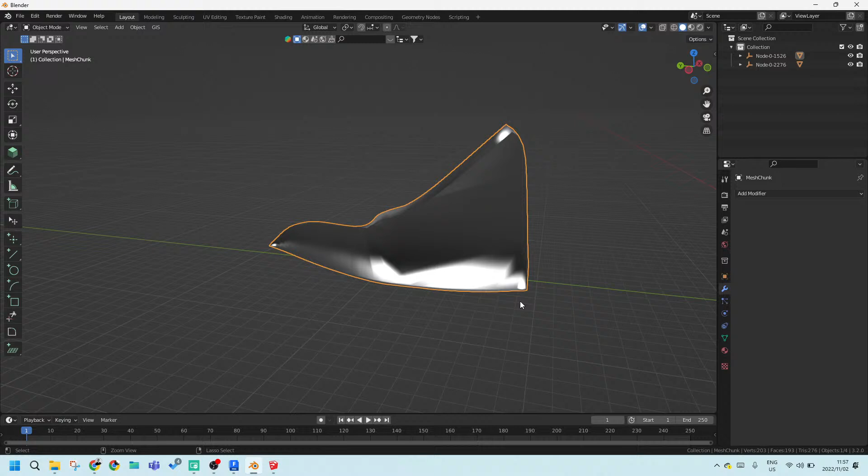Why is it not doing this? Let me just check the modifier is not capping it for some strange reason. Solidify.

Even thickness. Oh, that's what I wanted. That's what I wanted. I should have not only rim, because it exports the rim. So my bad. Apply. Tab.

That's way better. Let's see what it's done now. Very clean, yeah. Very clean. Now, file, export, Collada, take 4, export.

Yeah, that one was a disaster. But you see it brings it in perfectly. Delete, file, import.

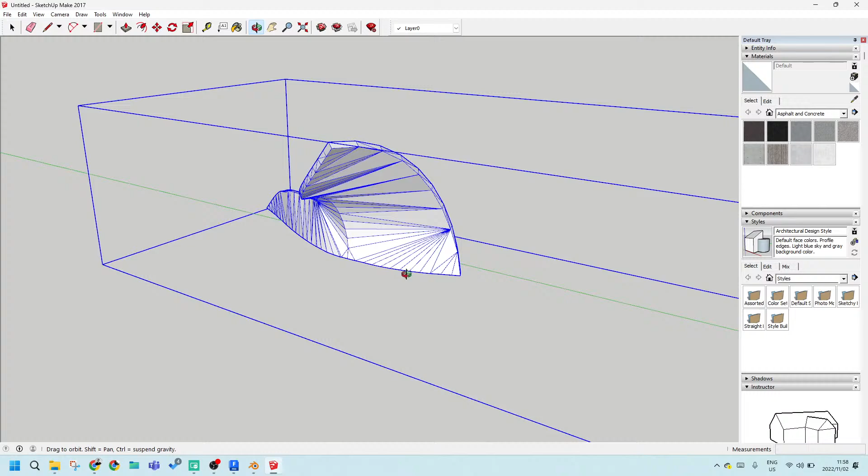Now, watch this. File, save. Yes, we really worked around here. But it's good to know these things. Trust me, it's good to know.

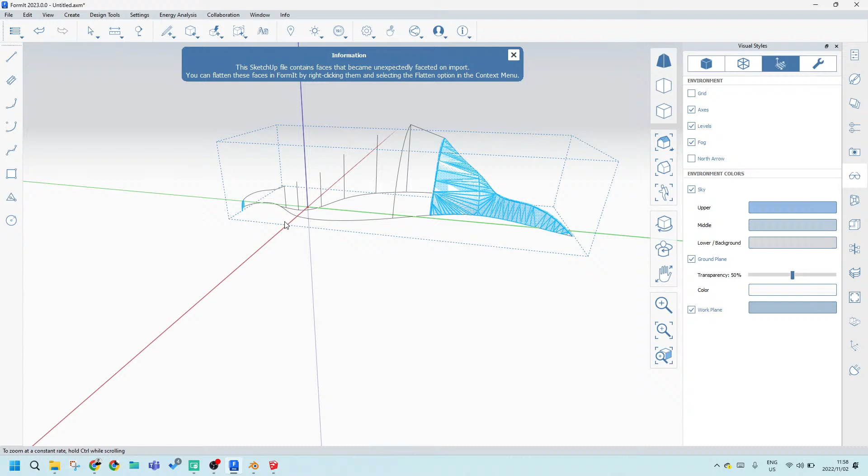Desktop, FormIt, watch this. File, import, locally. There you go. So you could use both now. Even it comes in exactly the right place. Check that out. Now, that's very neat. You check, control everything, right click, and you use this tool over here.

There is a tool for how you can do this exact workflow in Blender, by the way. You create face, you go to face, so this is just so that you know, maybe if you want to keep using Blender, add. See here, if you go to face, planar... where's my face tool gone now?

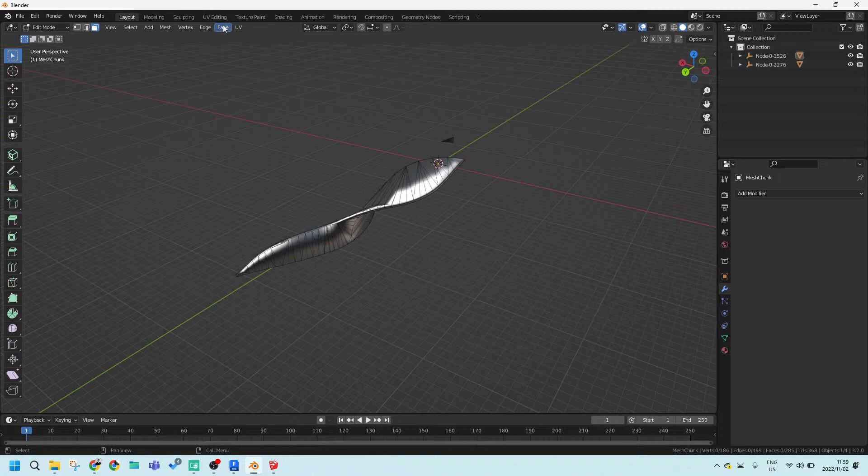No, it's because I'm in edit mode, that's why. Object, add, surface, NURBS. So what it does is it puts in a preliminary node in here. I did add it, oh there it is. It's very small, delete that. You go into this guy. Tab, now you untab again.

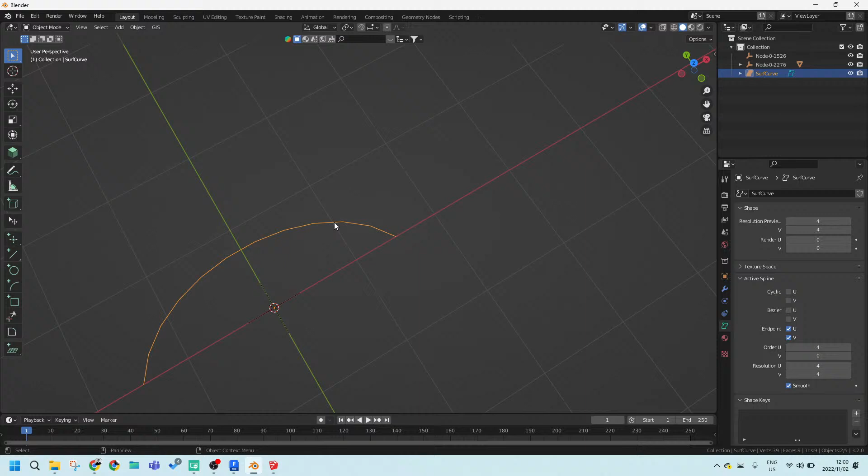Select this guy over here. You must just make sure that your faces, if you go to active spline, it starts, endpoint, it starts with these. See what it does here? It creates this spline. Tab, now you move these points. M. You move the points, the shortcut is G. Scrap, yeah, and then you subdivide.

You can keep adding. If you go Shift M, this gives you, because you want this handle. Just if you want to learn a bit more of this, now you just go and add the nodes that you want. Select everything, Shift D, duplicate it. Now you duplicate this, now this is going to be a bit more. Now these nodes, you can pull these nodes now into a better shape, see what I'm doing here? Subdivide it a bit more and then...

Yeah, watch this, grab both. Did you get that black interface? Oh no, this is... now you see it's created my face. Now you create more subdivisions, now you're using this tool rather to try and give you... yeah, that's what I like about Blender. That's why I want to try it in Blender, because then I can select the top view and pull it, and it doesn't make that weird thing SketchUp does.

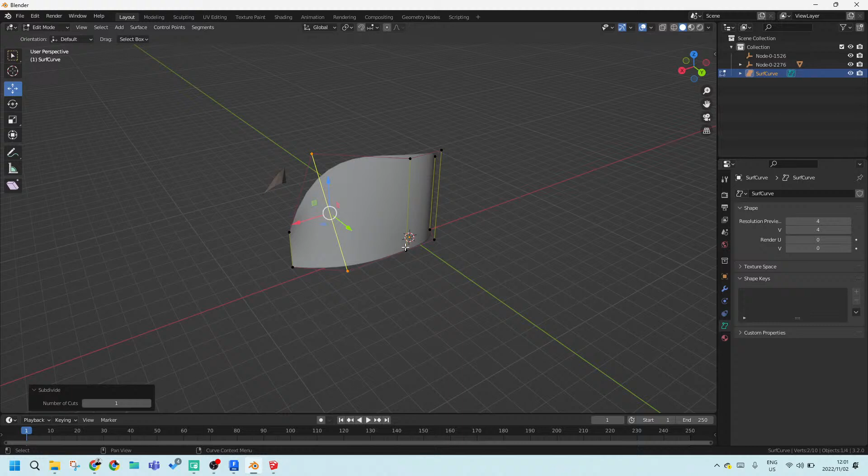So you just have to add a series of these together. Now you see what I'm doing? Then when you're done this, then you use your solidify. Cool, done, great. So let me stop doing that because now we've recorded this whole session. Cool, thank you, happy days. Guys, who needs help here?

I'm going to have to use some power shortly. Let me just see what your problem is.

Now, but that shouldn't be the sole reason. She's just proved that you can do very organic shapes. Okay, yeah, all you need to do now, I'm going to do this.

I'm going to get rid of, so let's grab this space over here, Control X, I'm just getting rid of it for now. So some of these are my walls, maybe I'll get rid of that one. Make that, make it a group. Just means now, now I don't have this problem.